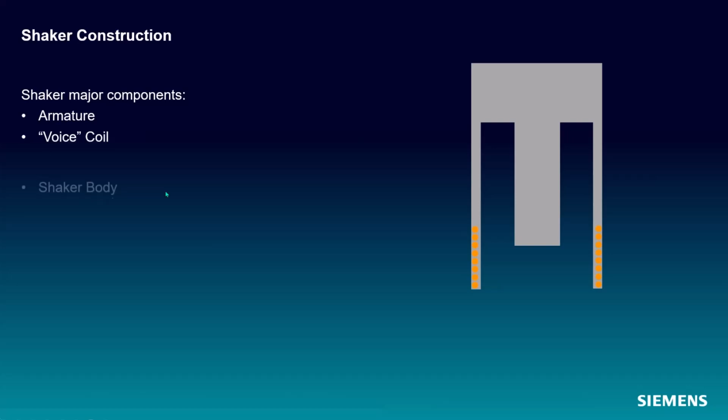And then there's a voice coil. Voice coil is a copper wire, or tube in water-cooled shakers, that's wrapped around the armature. And that is going to have a magnetic field passed through it. You have the shaker body, which is typically made out of iron or some other kind of ferrous steel or something like that to better create magnetic fields.

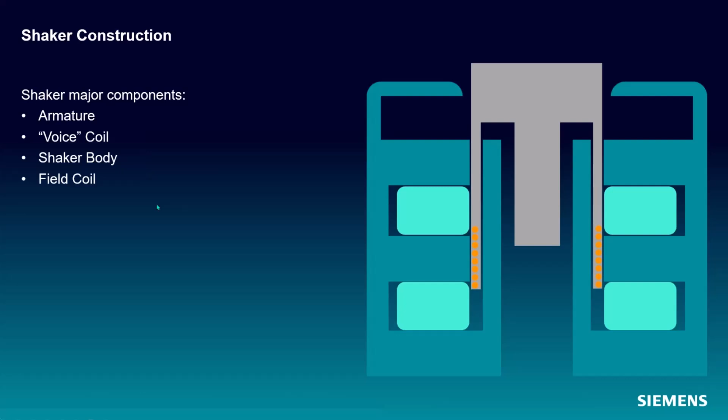You have a field coil. In big shakers, this is another copper coil that is energized to create a static magnetic field. In smaller shakers, this is typically a permanent magnet. If you're less than 100-pound force, modal type shakers are all permanent magnet shakers. But when you get to bigger shakers, permanent magnets aren't enough to provide the force that you need. So we go to these windings that create this static magnetic field.

Next, there's flexures. Typically, they're a J shape. This is what holds the armature to the shaker body, and these are flexible, so they move up and down, hence the term flexures. And this is keeping the armature attached so that the magnetic field isn't the only thing holding the armature in place.

There's typically a guide bearing, especially in bigger shakers. Some manufacturers do things a little differently, but for the most part, they're generally a post in the middle of the armature that the armature can slide up and down on. And that keeps the armature from tilting back and forth, which can be a problem because that causes cross-axial motion, which is generally undesirable in a single shaker application.

Then there's typically some pneumatic load support. This is going to take the weight of your test article so that the shaker has more available force from the magnetic field to move around.

Then there's typically some type of isolation mount between the shaker and the floor. Sometimes this is airbags. Sometimes the entire shaker body is bolted onto a large isolation mass that is also typically on airbags or is just a couple tons of concrete that's not going to transmit the vibration from the shaker into the rest of your facility.

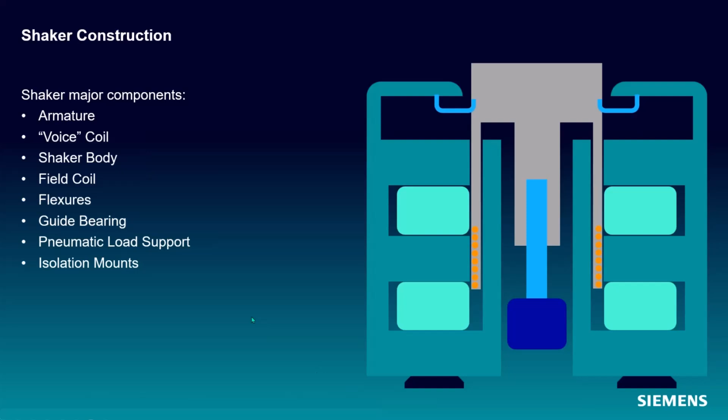So when you turn on the shaker amplifier, the field coils get energized. That creates a static magnetic field. And then voltage to the voice coil is varied, which creates this dynamic magnetic field that'll move the armature relative to the field coils with the excitation that you want.

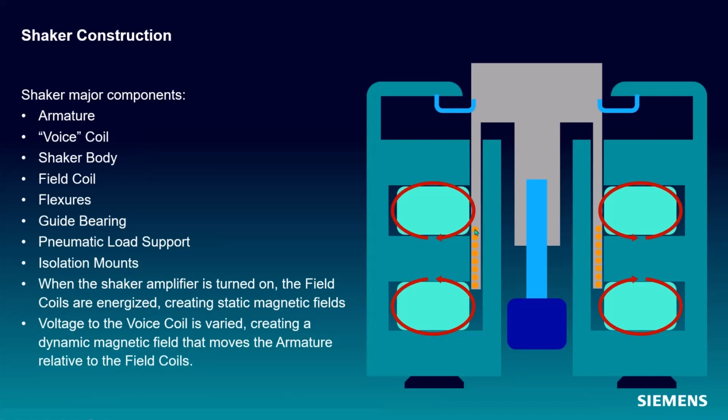Now, something that I don't have drawn in here is there's got to be some type of current lead that connects these moving parts, the armature and the voice coil. It connects the voice coil to the amplifier as well, so that current can get in here and cause that dynamic magnetic field that moves the armature.

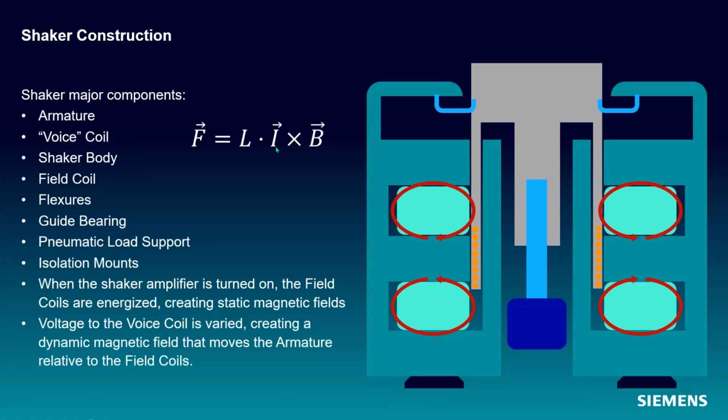And how the force of the shaker gets calculated is based on this. So the force is equivalent to the length of this copper wire in the windings. It's the dot product between the length of the wire and the cross product between the current and the magnetic field that's generated.

Now, shakers have a performance curve to them, and there's basically 4 distinct areas of this performance curve. At the lower frequencies, the shaker performance is limited by the maximum stroke of the shaker. At mid frequencies, the velocity is what limits the shaker. And then when you get to these kind of mid to high frequencies, that is limited by the force or acceleration.

F equals ma. So essentially, force and acceleration in this case are pretty much the same thing. And that mass component is the mass of your armature and your test article and everything in between: head expanders, fixtures, bolts, nuts, et cetera.

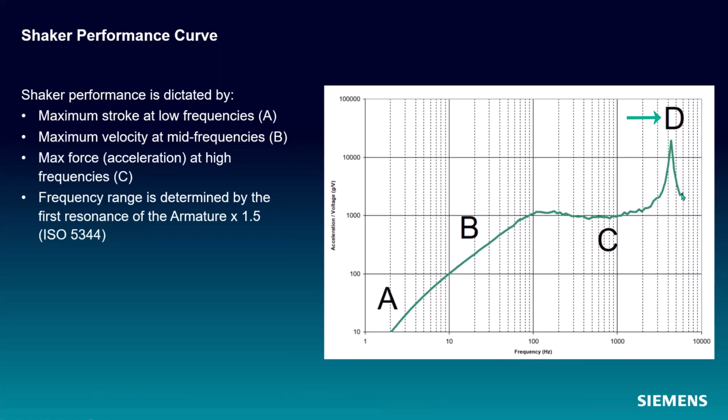And then you have the max frequency range, which is typically defined as 1.5 times the first armature resonance. If you look at ISO standard 5344, that's where this comes from. So you have this first armature resonance, and then when your shaker manufacturer says your shaker's rated out to 3,500 hertz, that is a frequency that's a little bit further on, basically 1,000 hertz in that case past that first armature resonance.

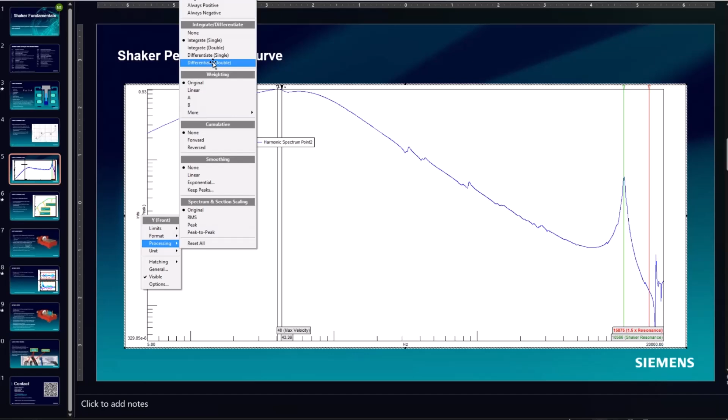And if we look at velocity, we can see that limit as well. If I just do a single integration, you can see the frequency of peak velocity here is around 40 hertz. And there's this little plateau here where we're maxing the velocity of the shaker. And you can see that if we look at the acceleration curve. If we go back to acceleration, you see there's this little blip here where we're going from velocity limit to force limit.

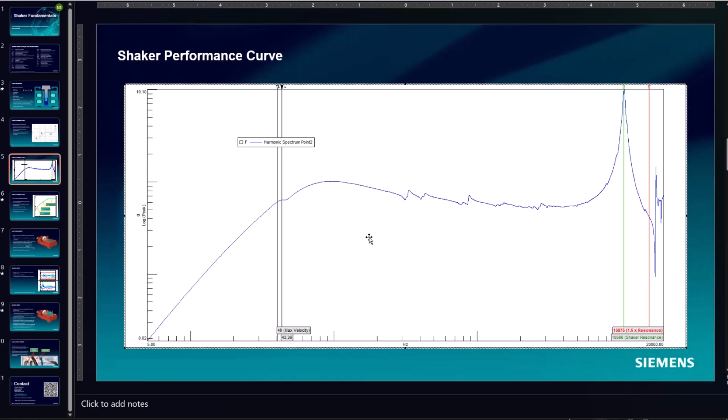And keep in mind, of course, that this is all bare table. Any of the shaker specifications are all based on bare table performance. So once you start adding mass, of course, you're going to have less available acceleration. And you can see how this kind of resembles that shaker performance curve to a certain extent.

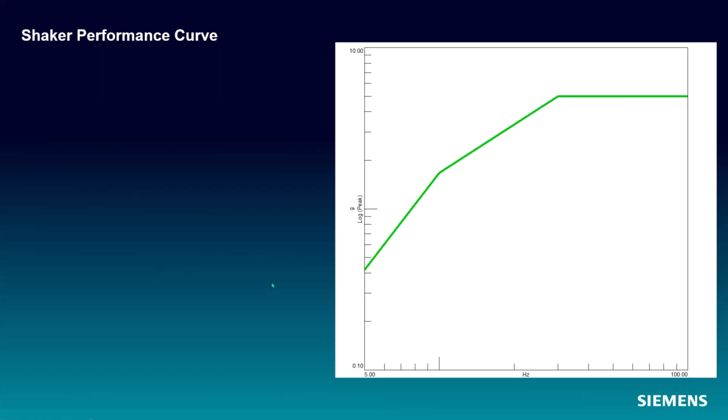If we go back, you can see I have this kind of transition here with reaching the shaker limits for the voltage that I'm putting in. How I generated this curve we'll get to in a couple seconds. Well, maybe not seconds, but a couple slides at least.

Other things that you want to keep in mind when you're looking at a shaker or doing shaker testing is that the rated force of the shaker must exceed the required test force. You don't want to try and do a test on a 6,000 pound force shaker that requires 6,000 pounds of force to do the test. Okay, so that's 6,000 pounds of force. What we're talking about is a 600-pound test article at 10 Gs. That's going to give us 6,000 pounds of force. And if you have a 6,000 pound force shaker, you're really not going to be able to do that test.

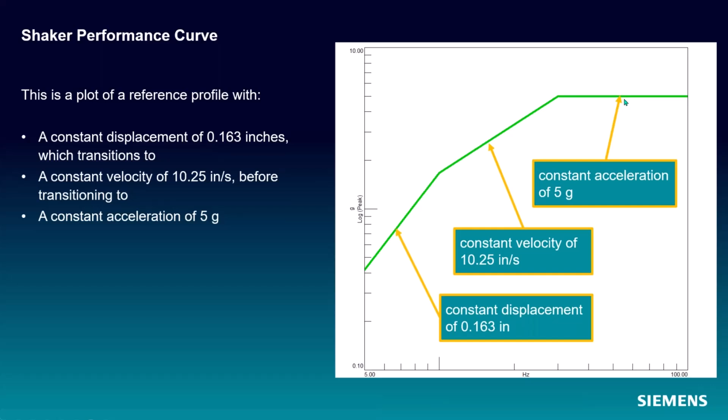You want to have about an 80% margin there, or well, I guess you'd say a 20% margin. You don't want to run a test on your shaker that exceeds more than 80% of the force rating of the shaker. And the reason for that is you want to have overhead to be able to control. So if you're at your maximum here, and again, if we go back to this performance curve, if you're at your maximum here, then you don't really have any room to control anti-resonances and resonances and dynamics of the test article.

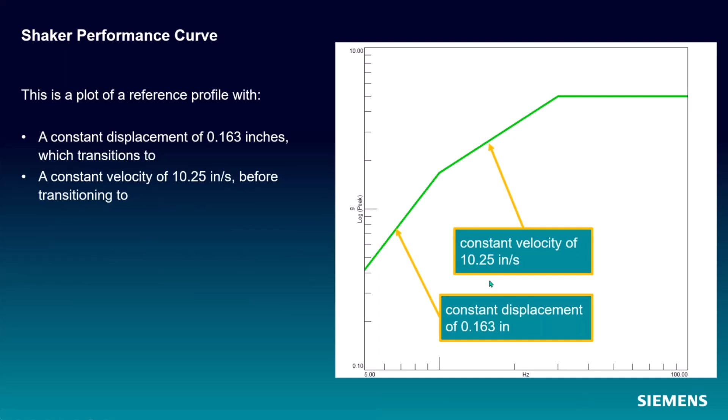Random shaker force is also something that you have to keep in mind because your shaker manufacturer rates the max random force relative to the bandwidth of the shaker. So in this case, let's call this a 50-pound force shaker. 50 pounds of force is over this entire usable frequency range. So if my shaker is rated out to 15 kilohertz, but I'm running a test from 20 to 2 kilohertz in random, I do not have anywhere near the maximum available force in what's called that narrow band excitation. So keep this in mind.

Approximately, you're derating your shaker by that narrow band over the full rated bandwidth of the shaker times the max force of the shaker. Sine is different because we're not exciting all the frequencies all the time. So if your shaker manufacturer says 100 G max in sine, well, you're going to get that maximum at each one of those frequency lines that you're exciting.

The other thing to keep in mind is the heavier your DUT is, the less max acceleration you have. It's this trade-off. The force remains constant, but if you increase mass, the available acceleration goes down. So that's another thing to keep in mind when you're running shaker testing. Also, cooling is very important. For every 100 degrees Celsius that the shaker armature is increasing, you get an increase of 40% in resistance in copper wire. Okay, so cooling is very, very important.

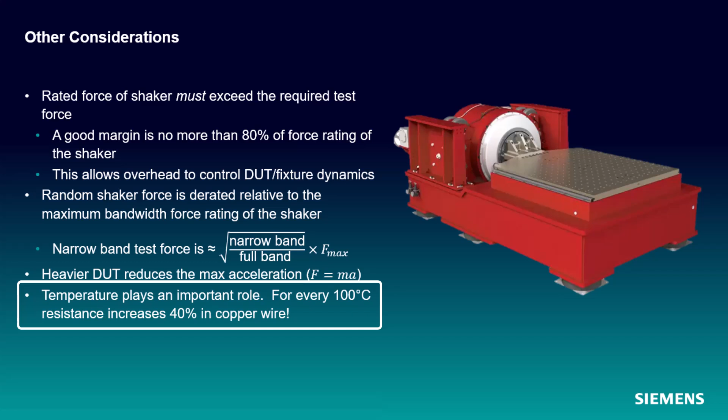And you see with some manufacturers that are doing multi-shaker type applications, what they'll actually do is use hydraulic oil to absorb heat. And they can get a lot more force out of a smaller shaker by submerging it in that oil and pulling heat away through the oil. It's a lot more absorbent of heat than just air cooling, and also a bit less of a risk than water cooling sometimes when you have multi-shaker setups and have a lot of stuff that you're dealing with, and sometimes you have that hydraulic compressor and everything already available, so it's integrated into the design of some of these things. Pretty cool stuff.

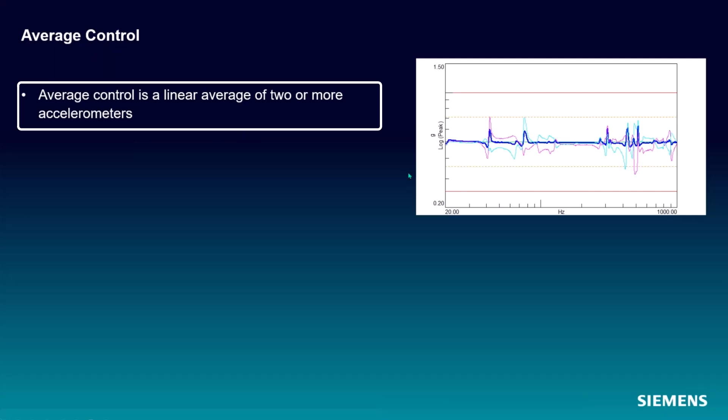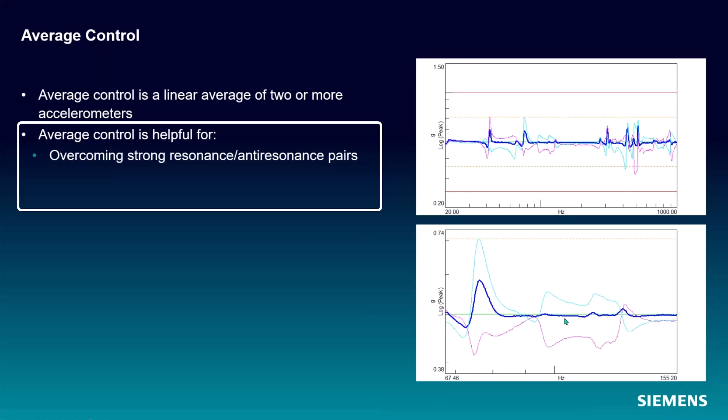Another thing to think about in talking about controlled shaker testing is average control. Average control is when you take two or more accelerometers and average them together for the control spectrum. And it's helpful for a couple reasons, but typically when you have strong resonant anti-resonant pairs, and this is kind of a great example of that. I've got one accelerometer in one location that's going up. I've got an accelerometer in another location that's going down, and I can average them together and say, okay, so in between these two accelerometers, I'm getting my target spectrum, my target vibration.

And this is a great use case for this. When you're testing on a slip table, a lot of times the vibration closer to the bull nose is more than the vibration that you get at the end of the table. And a lot of times with these large slip tables, it comes with a single tapped hole that you can screw a control accelerometer on. And for most tests, sure, that's fine, but it's kind of a misnomer, and this is kind of common thinking, that on this slip table or on my head expander, if I tell the shaker to do 1G RMS, that I'm getting the same vibration everywhere across this. This is kind of an assumption that we make when we're doing these tests, and it's not true.

The slip table, as well designed as it might be, is going to have some dynamics itself. So it's going to have areas on node lines that don't do much vibration. It's going to have antinodes that do more vibration. Okay, so sometimes what you might have is a fore aft setup for your control accels, where you're measuring acceleration up here and measuring acceleration down here and saying, okay, if I'm getting 1.5 Gs here and a half a G here and I average them together, then on my DUT, it's a 1 G.

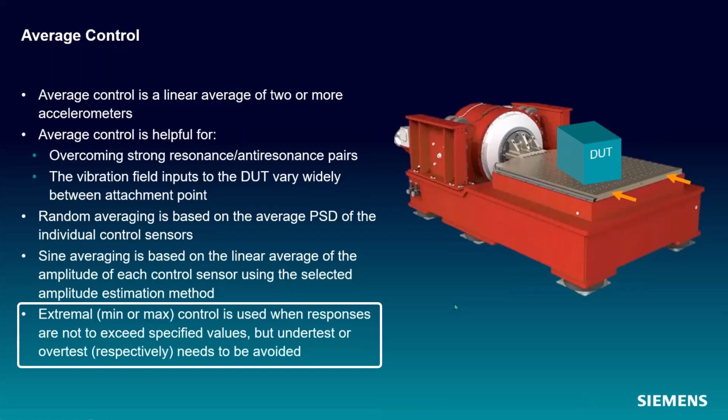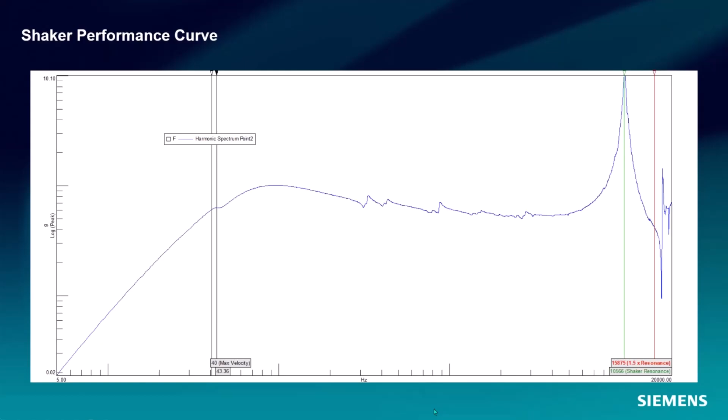So the first thing to talk about is the setup. I have a drive cable here, and there's a T. One end of the T goes to the shaker amplifier. The other end of the T comes into an input channel. And what we're going to do is control on voltage in this case.

And then the other is set as a measurement channel that's going to your control accel that's installed in your typical location on the table, wherever you typically put a control accel. If you're doing this periodically to evaluate shaker health, then you want to make sure you're putting the accel on the same place every time you run this test.

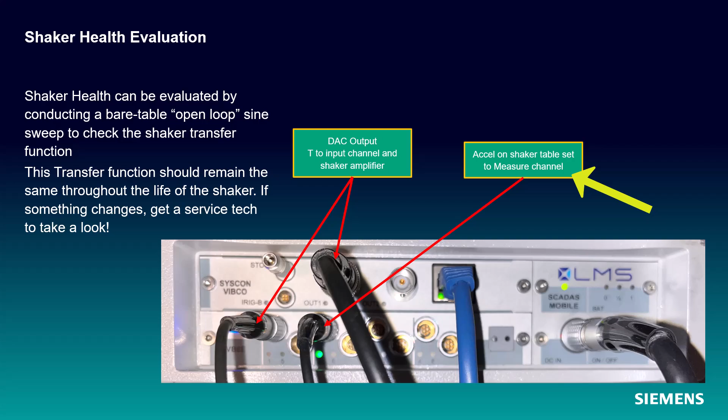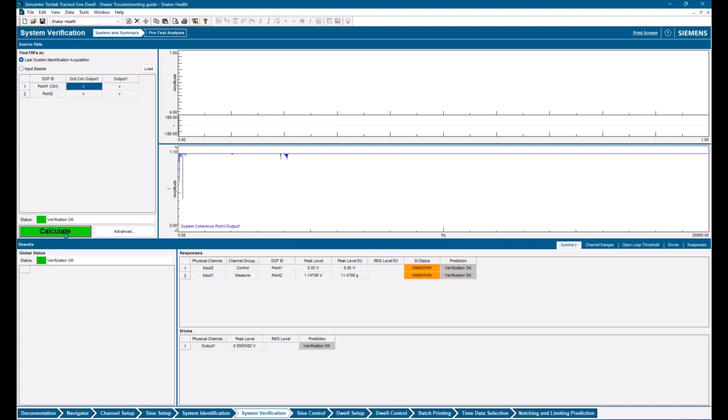All right, so let's take a look at Testlab. You can see I've got my accel set up here, and I have control on voltage, and that is teed off from my drive. So what I will do here is first I'm going to run a dwell, and I have my dwell set up to run at a fixed frequency at 100 hertz. And I'm going to adjust my amplifier gain.

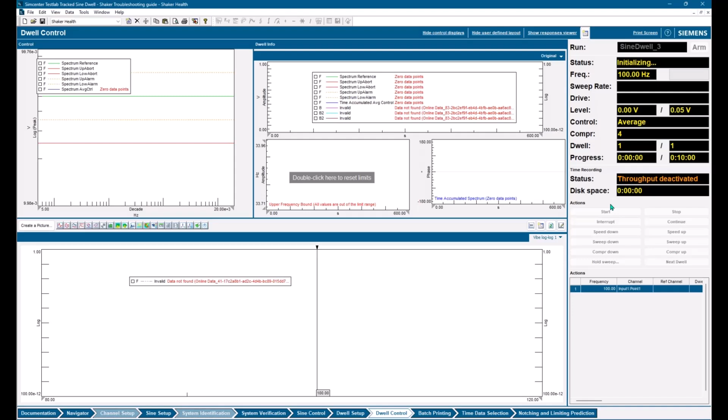So I'm going to tweak the amplifier gain knob until I see the acceleration that I want here. I'm going to do this sweep when I see 2 Gs at 100 hertz. When this comes up here, I'm going to hit start. And now you can see the voltage is coming up, but I've got no response here. And now I'm going to start increasing the gain on my amplifier, and you can see that G level start to come up.

Okay, so now I'm at 1.2 Gs right here. Maybe I can make this a little bigger. There it is. Cursor, properties, and we'll increase this text here. There we go. So 1.2, all right, I'm going to go up till I hit 2 Gs very slowly. Keep in mind that some of these gain knobs on your shaker amplifiers are logarithmic. So now I'm at 2 Gs at 100 hertz.

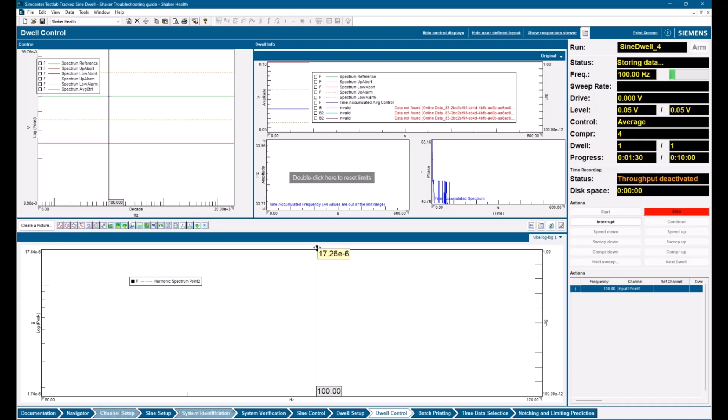So now I've calibrated my amplifier to get the value that I want at 100 hertz at the given drive voltage level. And I have my drive set to about 50 millivolts. Okay, so I'm going to hit stop here. And now, without touching anything, I'm going to run a sine sweep. I'm going to go into sine control. I'm going to hit arm. And I'm just going to start.

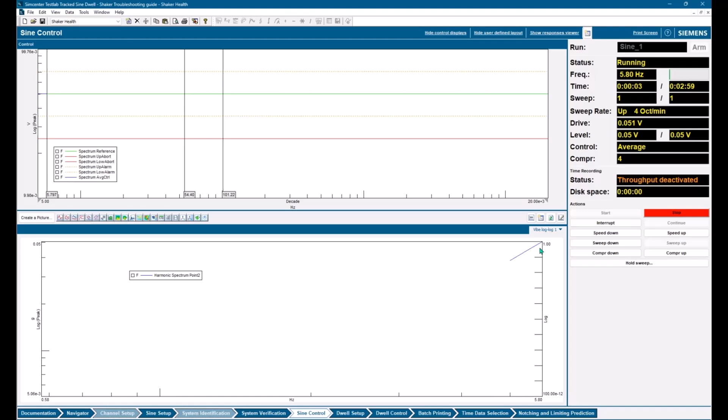I'm running at 4 octaves per minute. Just for time, it takes about 3 minutes to run this whole sweep. You might want to run this a little slower to get a better characterization, but here we go. So remember, I am putting out a constant voltage, all right? And we will see down here the response of the accelerometer.

And you can see I already have my cursors on here from the last sweep, and I'm pretty much at the same exact values that I was before for that max velocity number. I think on the slide I was at 40 inches per second, or I'm sorry, it was at 40 hertz.

Yes, the accelerometer is on the armature. Bare table, it's mounted right into the very middle of the armature on this shaker I'm using.

And right about now is basically the most annoying frequency to me. I don't know if you can hear it coming through or if the noise suppression is wonderful. Well, I'm going to cover my ears for a second here. All right, now it's beyond the point where I can hear it with my old ears.

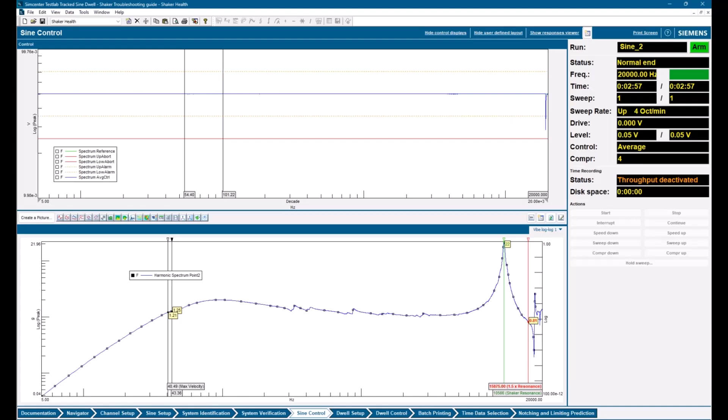But you can see my resonance on this sweep was exactly the same as the resonance in the sweep I did earlier, and that's what you would expect. And let's take a look at that. We'll start a new one here. So this is from today, and what have I got here? The last one, let's see, Friday.

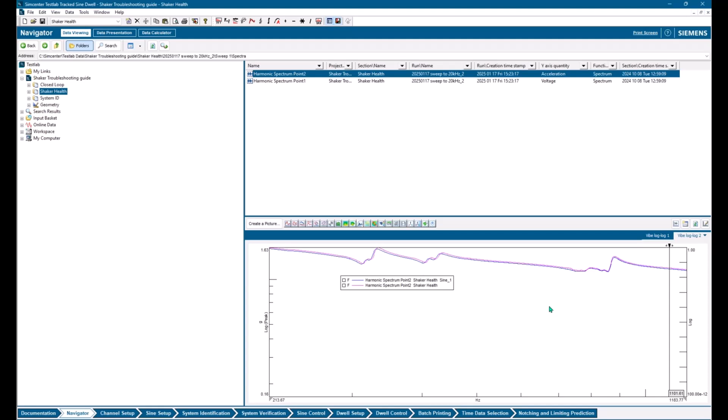Yeah, so they're pretty much right on top of each other, more or less. If there was any significant deviation between this setup and the next setup, then that's when you'd be concerned.